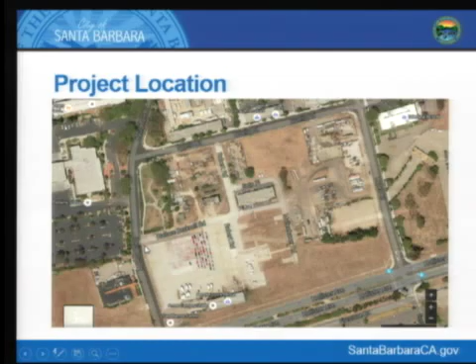Currently, there are actually two lots here. This little park is a separate parcel, and this larger parcel of about almost 15 acres would be subdivided. Approximately 7.99 acres would be purchased by Direct Relief. This also includes the construction of a new public road from Love Place to Lopez Road across the site.

A little background on this proposal. In September 2014, Council authorized a purchase and sale agreement between the city and Direct Relief. The agreement, dated October 9th, 2014, states that discretionary approvals for the project would be obtained within 18 months, so that would be April 2016. However, a 6-month extension would be allowed, resulting in October 2016 as essentially the deadline for this project to be approved.

The proposal came in as a PRT application in December of last year, and then in February and May, both dates, the project went to council. The project was designated as a community benefit project and was allocated square footage and also given a reservation of some square footage, which I'll talk about later. Then the applicant submitted the formal DART application. The city did the review. The project went to ABR on two occasions, in August and also more recently at the end of September. And then they just submitted their second DART application just a couple of days ago.

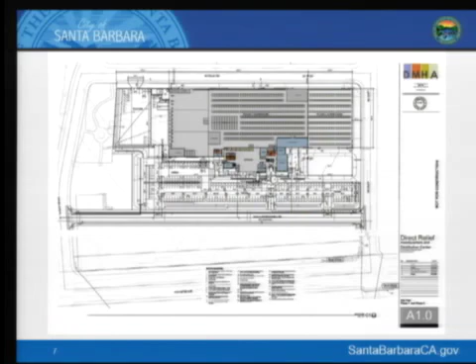Here's the proposed site plan. The project consists of a 155,000 square foot project overall. The distribution warehouse, shaded to the north, is approximately 127,000 square feet with a 2-story office in front, equaling about 27,000 square feet. There would be a secure truck loading area to the west and 162 parking spaces. The project also includes 26 bicycle spaces, 16 located inside the building and 10 outside.

The project site is zoned AI1, Airport Industrial. A couple of notable zoning requirements: a 45-foot maximum height requirement. For parking, it's 1 per 250 square feet for the office, and 1 per 2,000 for the warehouse area, unlike the rest of the city, which is 1 per 5,000. It's a little higher here in this area, and it's also within the Airport Industrial Area Specific Plan.

The discretionary applications for this project consist of a finding of consistency with the Santa Barbara Airport Industrial Area Specific Plan, a development plan for the allocation of 118,500 square feet from the community benefit, small addition, and vacant property categories, and approval by the ABR.

In regard to consistency with the specific plan, I've included in your staff report a list of policies that seem applicable to this project. These include visions regarding flexibility of land uses in the specific plan area, cultural resources, specifically archaeology, visual quality improvements to the project site, aesthetics, the installation of a new public road which is actually included in the specific plan itself, providing vehicle and bicycle parking, and promoting alternate modes of transportation. MTD is nearby and will be improved, and the plan also addresses the environmental impacts included in the specific plan.

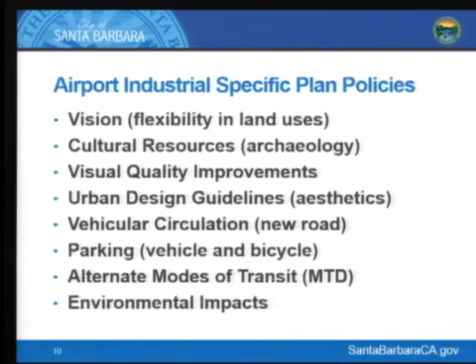The project requires development plan findings, which include complying with all provisions of the zoning ordinance, being consistent with the principles of sound community planning, and not having a significant adverse impact upon community aesthetics or character. Also, the size, bulk, and scale of the development must be compatible with the neighborhood.

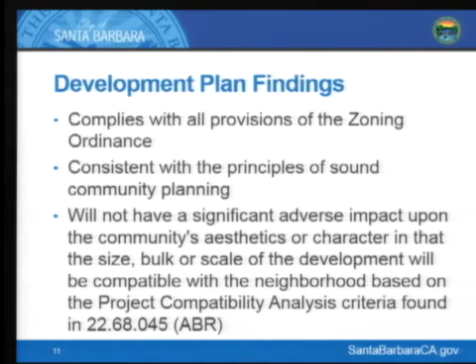This was reviewed by ABR, and they did make the project compatibility analysis criteria and found it to be compatible. Finally, it's consistent with the policies of the City of Santa Barbara traffic management strategy as included in the zoning ordinance.

The square footage for this project, which equals 155,000 square feet, comes from these categories. The council designated the project as a community benefit project. They allocated 80,000 square feet for the project, then approved a reservation of an additional 30,000 because the warehouse may be expanded by another 30,000 square feet, so that would be a total of 110,000 from community benefit, 2,000 from small addition, 6,500 from vacant areas of the specific plan, and some other demo credit that is not included in the development plan approval.

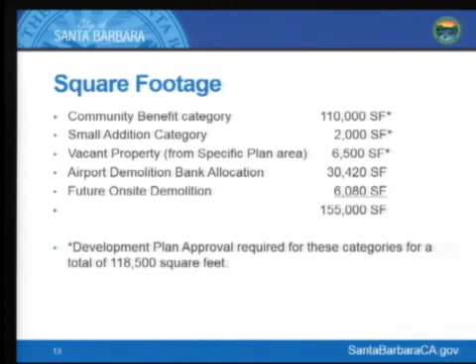They had some comments about restudying and proposing alternative surface treatments for the exterior of the warehouse itself, and to install more mature, taller trees initially.

In regard to environmental review, past projects have been proposed in this area. We have an airport-specific plan EIR for this area prepared in 1997. There was a supplemental EIR for the Gateway project on this site in 1999, and then an addendum for another project proposed in 2005. These projects were not constructed.

For the current project, the applicant has submitted a revised, updated traffic circulation parking study, an archaeological study, geotechnical engineering study, and drainage and stormwater quality study. We are currently reviewing all these reports as part of the DART review process.

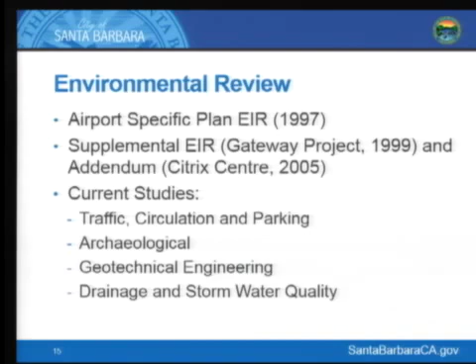The next steps for the project: they've submitted a recent revised project a few days ago. We'll be reviewing that for completeness, and when that's determined to be complete, we'll conduct our environmental review. We estimate it'll be back to you at the Planning Commission in early 2016.

Concurrently, the airport is doing the subdivision portion of this overall project. The airport will submit a subdivision application soon, which will go to the staff hearing officer for approval. They're also concurrently going to be doing the on-site soil remediation, preparing that site for the new proposed project.

Just listing here again the discretionary applications that will be before you when the project returns next year. That concludes my presentation. Thank you.

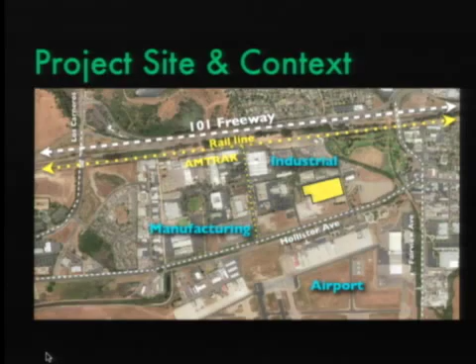While it looks large and flat and possibly unconstrained, we had a discussion about that at the site visit. There are actual constraints that the design team needed to deal with, and I think this project design is responsive to those, so we just wanted to show them to you as well.

So on the next slide, here's the site. You see the roadway names. I just wanted to point out those names are actually aviators who lost their life in World War II. That whole area north of the airport has names that reflect local aviators who passed away in World War II.

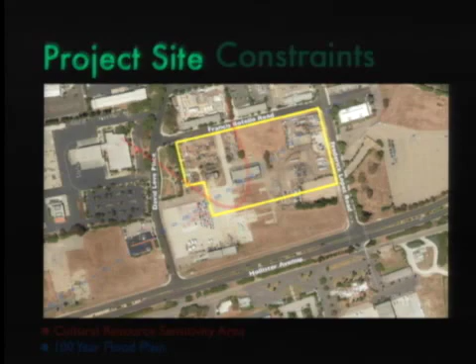So there's the site, and now the constraints. The red line indicates the area on site that has some cultural resource sensitivity, and the blue line shows you the 100-year flood line. In addition to these, we do have some spot soil contamination areas on the site that are a result of the site having been a military air station during World War II.

We also have geotechnical constraints in the way of soils that are loose and high groundwater. We have shallow groundwater on the site and uncompacted fill and a myriad of geotechnical concerns that the project design team has had to deal with in the design of the foundation system and in the stormwater treatment and drainage plan.

So those are subsurface constraints that you wouldn't necessarily see when you go out and look at the site.

Next slide, please. Kathy also covered this really well, but just to quickly go over the major components of the site: the distribution warehouse is roughly 130,000 square feet if we build both phases at once, which Direct Relief would like to do. If there are financial constraints, they have to build 100,000 square feet in the first phase and could phase the 30,000 square feet on the eastern end at another time, but we do hope we're able to build it out all at once. There's also about 30,000 square feet of administrative offices. This will be the world headquarters for Direct Relief, and that floor area is necessary.

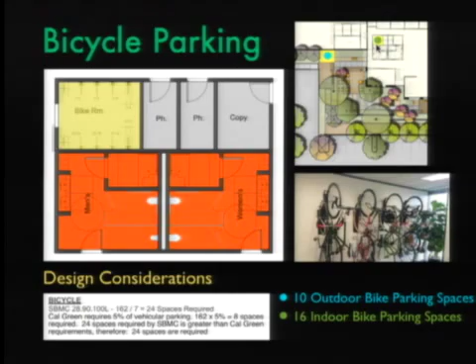And I'm going to let Suzanne come up and make a few closing comments.

Just briefly, it's a sensitively designed project, and it's a use that's compatible with the area and compatible with the uses that were envisioned in the airport-specific plan. It's a large project, both in size and in purpose, a very significant project. We're anxious to hear your comments and hope that you support this project and are as enthusiastic about it as we are.

We have team members here who are available to answer your questions, along with Mike Holliday from DMHA. We have Michelle Swanitz, and we also have Courtney Jane Miller, who is our landscape architect. And also with us is Judy Parch, who is the Director of Compliance and Human Resources at Direct Relief. So between all of us, I hope that we can answer any questions that you might have. Thank you.

Anything else from the staff? I see Ms. Johns and her cohorts here. Do you want to have anything to say?

I do have a question for you while you're in the spotlight. Since this is on airport property and you get money from the FAA, does the FAA have any hooks in this that you have to check some squares with?

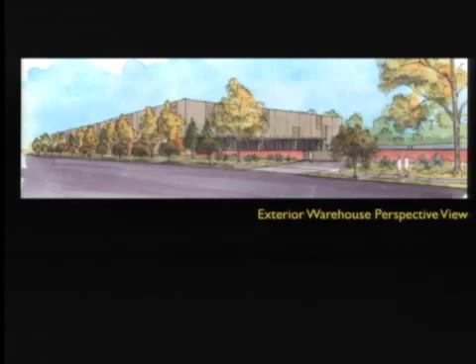They also asked for some larger trees, so we've done some 3D studies. If you're interested, we can show you Camino Real Marketplace, probably the only other large established structure here in Santa Barbara, Goleta that's done this before. It shows that small trees grow big over time, so we want to plant large enough trees — this shows you what it looks like after 17 years of actual landscape growth at Camino Real.

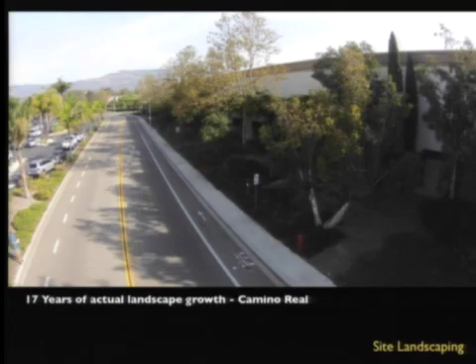This is the Costco building, shot from a drone 30 feet in the air. It's amazing the difference when you're down at the ground plane versus up high. There's one other shot showing what they want to see — some higher trees that break the parapet height on the warehouse building.

So it's texturing that box, the concrete structure, and also adding landscaping to help it articulate. We're also looking at ways to articulate the parapet height — we can't go any lower, so if we do anything, it's got to go higher, which is sort of counterintuitive. We're looking at ways to address that concern.

Okay, thank you very much.

Now, on that topic, still about resurfacing or changing the skin, I have two questions. First, green building design — can you tell me what you've incorporated in that regard? And with such a large surface, which gets to one of the areas staff asked us to comment on in terms of bulk and scale, are there any artistic elements that can be included?

So green building and artistic elements, since in a way this is an area — especially with the airport selling this to Direct Relief — that's going to be viewed in transition. We talk a lot about funk zone transition, but this is a very different area, still city property, but adjacent to Goleta.

And I think there are numerous opportunities with this project to reference that transition. And then I'll get to cultural history, because that also is talking about how we reference the archaeological and cultural history without completely obliterating it in redeveloping this type of property.

My question is related to sort of a gratuitous use of block walls in the front of the building. And maybe it's the landscape plans, but are those there? So you have a lot of CMU block walls in the front of the building elevation. Is that part of the security plan to have that? It's almost like a TSA sort of thing, or just voluntary?

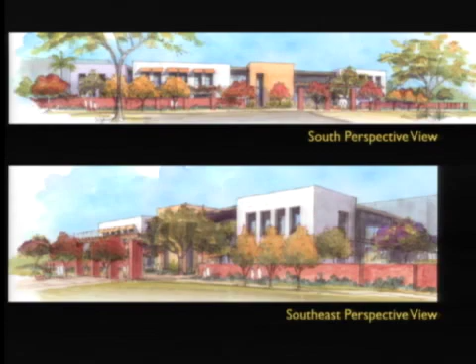Mr. Chair, Commissioner Higgins, what you're referring to is the unrendered plans. We've 3D modeled the entire building, so it's a little deceiving, but we're trying to show ABR what we've actually figured out. This is probably a better image to look at. Those walls actually serve two functions. One is on the back side of that wall is the public breakout area for the boardroom. This whole box where the pointer is located is the conference center component of the building, where we've got several meeting rooms, and that wall serves a functional purpose.

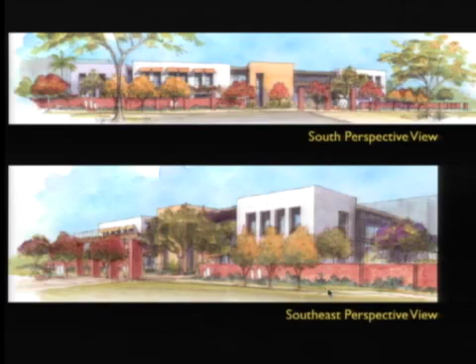It's an 8-foot high wall that basically provides protection, screening, and security for the building towards the front. And then on the other side, towards the south, there's an employee breakout area off the cafeteria.

That's fine, I just was curious if it was a security thing. Courtney, do you have anything to add?

I just wanted to add, the walls you're looking at in this rendering, the orangish colored walls, those are actually intended to be semi-private, relatively open walls. They'll in fact be more like 4 or 5 feet tall. The intent is, as Mike mentioned, to separate those interior spaces from the public spaces.

And just one more landscape-related question. On the infiltration basin, what's the slope of the side slopes? What's the grade to get down to the bottom of the basin? And just to help me out, is there any use for it? Is it fenced, or can you do passive recreation in that, or is that a no-no?

We are looking at that. In fact, that was an early idea I thought was very important to incorporate, in particular that easterly basin, so that we could provide some sort of outdoor, more informal amenity—I won't say recreational—but something that allows for an alternative use for that basin. Currently I believe there is a 5-to-1 slope for about 10 feet, and then a 4-to-1 after that, so it's a very gentle slope down into those basins.

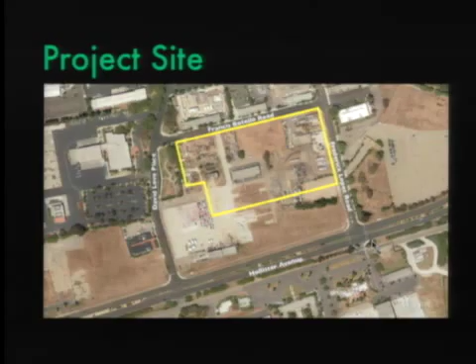There's the front entry, and we actually haven't located any bicycle parking over there. That may be something to think about. But primarily what they thought was it's going to be in that area right there, which was the exterior bike parking for the staff. There's both interior and exterior bike parking. So does that answer your question?

It does, and one follow-up question to that. If someone was biking in, is there a route where they can take their bike all the way around to where the interior bike storage is? Can they actually ride their bike to that spot, or do they have to get off and walk the remainder? It seems like a long walk, and I hope there's a lot of thought put into it, and it sounds like you're starting to, so I appreciate that. But when it comes back, I would like to see some more thought put on paper on how that would actually work for commuting purposes if somebody wasn't simply just driving in and parking.

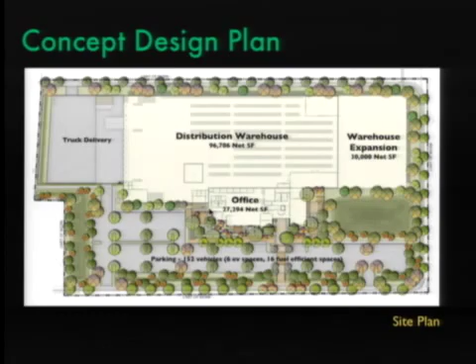Mr. Chair, Commissioner Peugeot, if I might add, if someone were riding a bike to the site, I would imagine they would ride along our new frontage road on the south, Wallace Becknell, and then into the westerly driveway entrance, which is over on that side. If they drive or ride straight in, there's actually a sidewalk that's curb adjacent there where they could ride up to the sidewalk and walk it across, or they could use the parking lot essentially. I'm not asking for that level of detail right now, but I think when it comes back, I would hope to see how those features would actually play out in the site planning and operationally with the employees, because it is a remote site. It's not like you can walk down the block and have lunch or pick up a bus or meet a friend.

Okay, that's a great comment. Thank you. And then I have a couple of questions. I think it's more for staff.

It's back to this question of the allowable uses in the zone, which I think is important for us to get a handle on, at least next time it comes around. I'm guessing from what I'm hearing about the project that it would be difficult to share surplus space if it wasn't immediately needed with other types of short-term lease operations. But I believe in this area there is city intent to also encourage incubator businesses. So I guess either unused space that may occur in this vicinity, or in the event that sometime in the future Direct Relief International decides to move elsewhere or sell the property, what would be the reuse and the ability to meet those kinds of goals? Because this is a single operator taking the use of an entire large site, which is, the need is clear, but we're going to need to look at this once it's built for down the road, maybe 50 or 75 or 100 years from now too. So how does that kind of fit in with that goal?

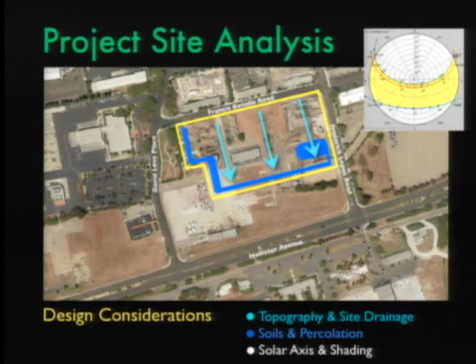Of course, when all those trees grow in, you're not going to be able to see it anyway. But yeah, so we were trying to show the mass, bulk and scale, worst case scenario of looking at the building from that area. Obviously, when you go further north, there are so many existing trees you actually lose the mountains in the trees. So this seemed to be the best place to sort of analyze. Not to mention that the airport project is going to be in front of that, but we're looking at just sight lines across an open piece of property right now. Okay, thank you.

Thank you. I have but one question for staff and the applicant. Given the magnitude of this project and its regional impact, is there any plan in your process to have a courtesy review at the Goleta Planning Commission? I know the staff report says you're working with transportation staff at Goleta, but is there any plan for courtesy review by the Goleta Planning Commission?

Commissioner Chair, we have not talked about that actually, but we are, like you say, in contact with Public Works. Well, given the magnitude of the project and the impact on Goleta, I would recommend that you do that. I know it will be an additional delay in processing things, but I think you could probably fit it in there at some point. Good neighbor policy and all that.

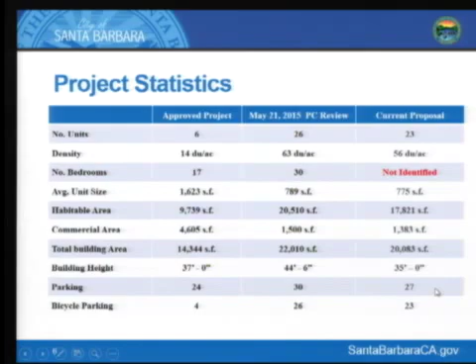Looking at the priority housing overlay and the density chart, the previous version of the project reviewed by the Planning Commission on the 21st of May was at 63 dwelling units per acre. We are now at 56 dwelling units per acre. I just wanted you to see where we fell on that chart.

Staff's recommendation includes some key points: the project does meet the zoning standards, and the applicant is intending a design that does not require any zoning modifications. They have greater than the minimum setbacks required from interior and front property lines, and the project is consistent with the general plan goals and policies for new rental housing projects.

Staff recommends that the HLC comment on whether the project is consistent with the compatibility criteria numbers 2 through 5, outlined in the municipal code, subsection 22.22.145 subsection B. I do have those on the following slides so we can go through that.

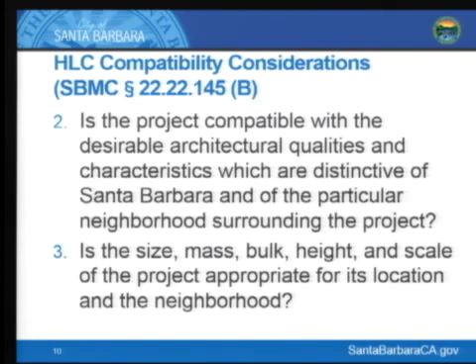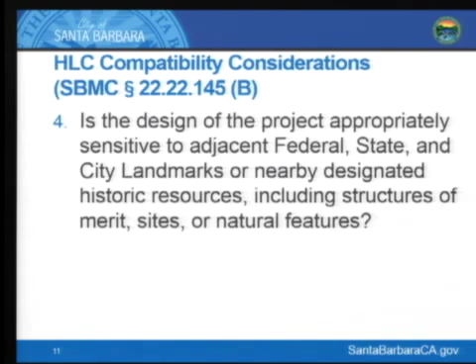These are questions the Commission should ask themselves. Is the project compatible with the desirable architectural qualities and characteristics distinctive of Santa Barbara and of the particular neighborhood surrounding the project? Number 3: is the size, mass, bulk, scale, and height of the project appropriate for its location and this neighborhood? Number 4: is the design of the project appropriately sensitive to adjacent federal, state, and city landmarks or nearby designated historic resources, including structures of merit, sites, or natural features?

Number 5: does the design of the project respond appropriately to the established scenic public vistas? In order to evaluate number 4, I provided relevant maps showing the boundary of the original El Pueblo Viejo, shown in dark gray, bounded by Figueroa, Laguna, Ortega, and State Street. The various colors show whether buildings or properties are landmarks, adobe buildings, structures of merit, potentials for designation, or structures built prior to 1945.

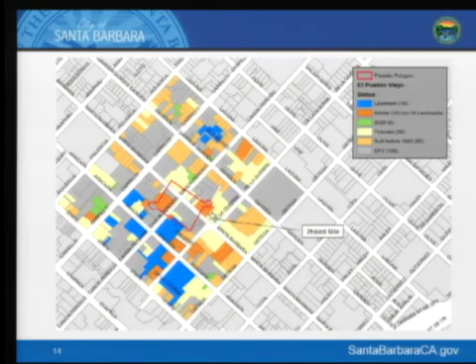This next slide shows the El Presidio de Santa Barbara Historical Park properties in yellow that make up the park, and then a 250-foot buffer surrounding that, shown with the red outline and gray clouding. I have passed out these slides to you, and you have them in front of you.

I'm now going to turn it over to the applicant for his presentation of the actual design of the project and how it has changed since your last review.

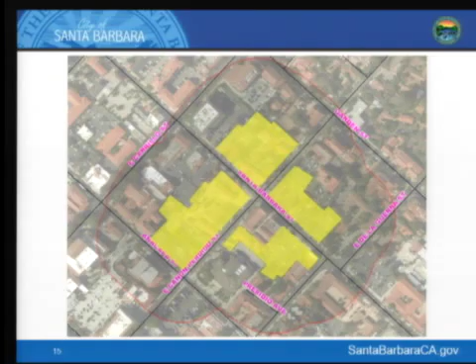Okay, Mr. Hochhauser, are you going to give the applicant briefing? I am. There we go, thank you. I'll reiterate, good afternoon to everybody.

I'd like to start off by going back to Suzanne's information. The staff report for the PC hearing where we last appeared indicated that our prior project was 26,000 square feet. You had indicated 22,000 on your chart, but our notes, drawings, and your staff report had indicated 26,000. We're now reducing it down to about 20,000 square feet, so I think we want to come before you showing movement, and that's an important fact. I'm going to take about 23 minutes today with the presentation, if that's okay. I'll move quickly, I understand time's of the essence.

We appreciate the opportunity this afternoon to present the latest refinements and modifications for the AUD housing application at this address. We believe the apartment project before you now is an opportunity to deliver real infill rental housing at a great location downtown. We feel it's more aligned and has better consistency with policy than the approved luxury condominium project currently on site. It is our intention today to demonstrate that this current project is not only significantly responsive to concerns raised at the prior PC hearing and all HLC hearings, but also champions and incorporates the objectives and design goals set forth in the city's urban design guidelines.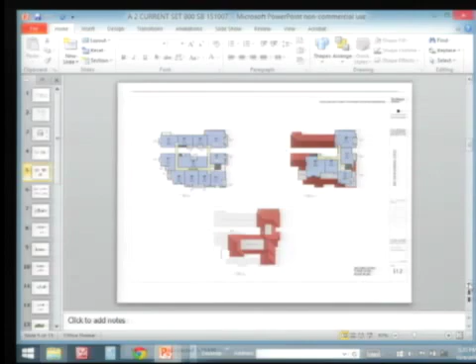If you go to the next slide. Quickly, these slides illustrate the previous proposal before you relative to today. The red dotted line indicates the volume and mass which was before you previously.

Next slide, please. This is a shot showing the Paseo splitting the mass of the building here, with the Anacapa School at this location.

This is the small commercial plaza. When I say small, I mean about 1,000 square feet of placita in front of a small 1,383 square foot commercial space, and then varying roof pitches and roof types to address those comments, a softening of the architectural elements at the corner. Moving right along, please.

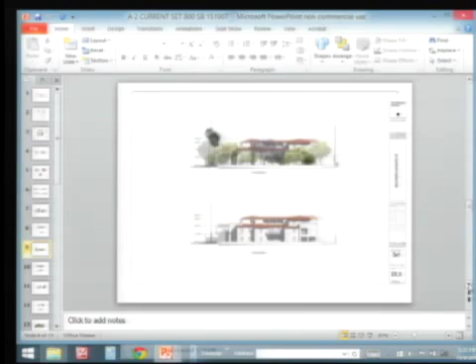And just going right around the building here with the different views, and we can come back to these. I don't want to use up time. Keep going, please.

I might stop here for a second, because in the minutes they liked the elevation facing the Anacapa School. That's what's before you right now.

Next slide, please, with and without vegetation. The landscape plan—you might note in the HLC minutes that they thought the landscape plan was moving in the right direction. Another kudo to Courtney, she's the landscape architect on this project as well.

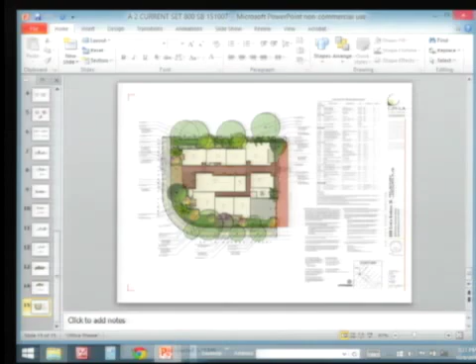Keep going, please. Open up the next file. So this is right out of the urban design guidelines. This is that small placita with the little porch underneath. This is literally what our section would look like through the front of the building on Santa Barbara Street, and it's taken right out of the guidelines.

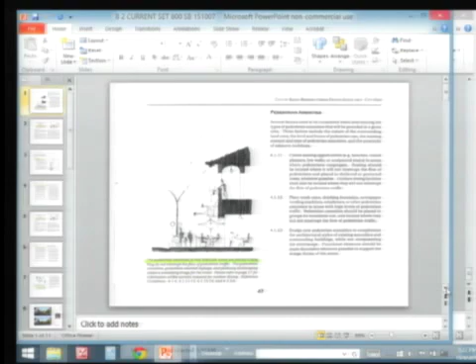The guidelines are replete with discussions about intimate paseos, little placitas, interfaces like this. And I think the project, not to be too proud about it, really does address specifically many of the attributes you can find throughout the guidelines. Go through this—it talks about encouraging this type of design, and then you've got literal examples of it.

And then here we're into the view simulations. You see going east on De La Guerra, and we've got several, so we move around different points to show you. This is kind of a third from Santa Barbara Street—you see the view of the project inserted there. And then as you move closer to the corner, the next slide, please.

The next slide. And then this is coming around onto De La Guerra, on Santa Barbara Street. And then the opposite side of the street. Next slide, please.

The above slide is the proposal. This is as it exists today. And then the next slide.

Now here's a streetscape of all of De La Guerra, showing the inserted project as proposed with the modifications of height. I think if one looks at all the architecture up and down the street—and we also provided the heights as surveyed of various elements on the buildings around us—this is a great one to underscore the compatibility of size, bulk, and scale.

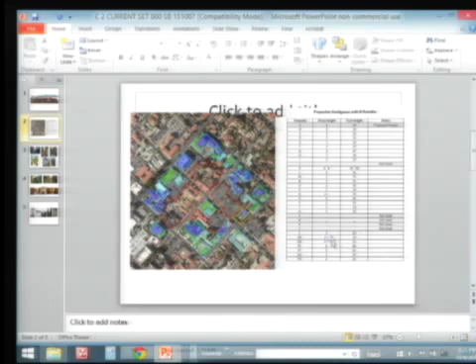The next slide. Yeah, this is a great illustration that shows the surveyed forms and masses of buildings all around and contiguous with the boundary of the Presidio.

The purple elements are the 3-and-above story buildings, the green are 2-story and above, and the very light shaded ones are the 1-story elements. I might point out that we only did the structures—there are other structures of mass and bulk, but only the ones contiguous to the Presidio were utilized in this analysis. And then you can see all the heights and the story analysis.

The proposed project is really a fish swimming right in the middle of the school.

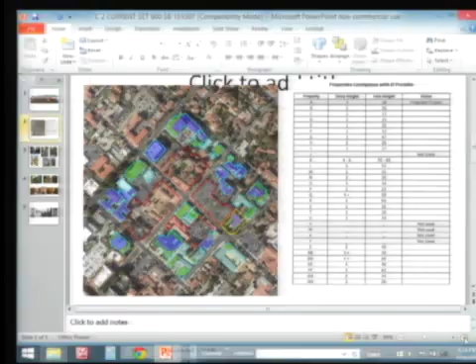So we're not asking for any exceptional height. We're not violating the fabric and texture of what exists all around the Presidio. There are many buildings that are 4 and 5 stories, 60 and 70 feet, right up against the boundary. As pointed out by the Anacapa School and our design drawings, the half of the project on the north side of the Paseo is literally lower and further set back to that boundary of the park and the Anacapa School than the project that's approved.

And then these are just examples, some in Santa Barbara and some without, of little paseos and intimate streets that show balconies and residential situations, which is really, if you read through the urban design guidelines, all about this kind of approach to the architecture.

Next slide, some more. Just to underscore that the architectural elements in our proposed design very much incorporate these kinds of headers over deep set openings, columns, heavy timber eaves, literally the stuccoed adobe walls with the tile caps, and these kinds of balconies. If you look at our drawings, this is what you find throughout.

We're working with the HLC. We believe we're on the road to a successful evaluation by that commission, especially with these responses to our last hearing. So with that, I'd like to point out that we feel we've addressed the concerns we've heard all along, and we've got a project that, even without the AUD, in terms of size, bulk, and mass, and architectural styling, is within zoning issues in terms of setback, height, and step back — we're right there. And this is an AUD project trying to deliver, consistent with housing policies in the general plan, some housing to the downtown. So I'll save the remainder of my time for questions and further discussion.

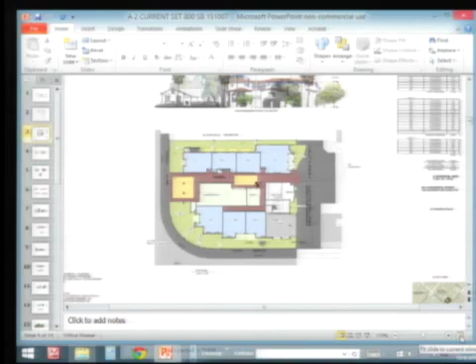So this placita is about a little over 1,000 square feet. It interfaces, this front of it interfaces with the sidewalk and the crosswalk as you come up De La Guerra from the west. If you recall, going back to the site plan, the intersection is offset, so as you're moving east on De La Guerra, you actually have to go around this jog. The crosswalk from this side of De La Guerra comes across right here, and this placita has a complete interface with the sidewalk. It is partly exposed to the sky and partly under porch, just like the diagram I provided in the urban design guidelines previously. So this is kind of like a little commercial plaza for tables and chairs — it might be an ice cream shop, a coffee shop, or a small restaurant. Then there's about 1,400 square feet of commercial space along the paseo of the project.

And the orientation of the commercial space is to the paseo or to the street? To the placita, to the street. So these are the openings into the commercial space right here.

Okay, and then the ground floor residential units that face the street, not the ones that face the Anacapa School. Could you walk me through where their outdoor space or outdoor living area is? I bring this up because one of my concerns is how that could create a potential conflict with public use of the street, with someone having their outdoor living area right where there's major pedestrian activity with tourism.

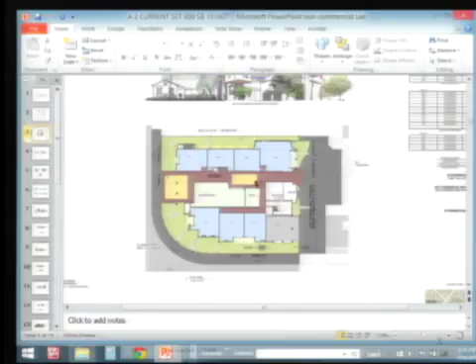Well, this is a fairly significant landscape buffer. The access to the units is from the paseo, and these are private little patio areas buffered from the retaining wall. There's a natural sandstone retaining wall at the sidewalk of about 2 to 3 feet, and then a 10-foot landscape buffer, and behind that you've got a private patio. So any pedestrian traffic on the sidewalk is not only below the sandstone retaining wall, but there's about 10 feet of vegetation between that wall and the private patio. So there's no direct traffic from this sidewalk to these units.

It all comes from here. The elevator's right here, bicycle parking's right here. There's lots of traffic that would come through here. By the way, I might mention, Commissioner Pujo, consistent with some of the larger policy goals of planning, this paseo has direct access to the historical fountain in the building behind.

Correct, yes. And the residential unit closest to Santa Barbara Street, where is its outdoor space? No, sorry, the other one, south, down there. Again, it's right at this corner, but there's 20 feet of landscape buffer between the edge of that patio and the corner. And what encloses that, is it enclosed by a wall? It's recessed deeply into the mass of the structure so the walls look really thick.

I see, so the walls come up around a little bit. I can kind of see how it might do that. Okay, those are my questions. Thank you.

Commissioner Higgins. Thank you. On page 3 of the staff report, there's a table showing the approved project, the May 21 review, and the current proposal. There's a blank there in common open space. So it looks like you had 1,500 square feet of common open area, and now you have 0?

That's incorrect. Okay, yeah, so one of the last issues, Commissioner Higgins, before staff let us come back to this HLC hearing, they wanted to review the drawings to make sure substantial changes were made and that we met all variance and zoning code requirements. One of those issues was to make sure we met the common outdoor open space. So the courtyard that the Paseo runs through actually meets those dimensions on the interior of the project here.

Okay, and then the slides that you went through, the 3 slides on 24, 25, 26, which are your visual simulations. From De La Guerra, from Garden, 2 spots on De La Guerra, 1 spot in Garden. No, two on De La Guerra, 2 on Santa Barbara. And then, that's what I meant. And has HLC seen those? They have not. Okay, that's troubling.

So then, Ms. Regal, could you remind me on the whole distance, whatever the proper phrase would be, for historical or cultural sites? So you drew the line at 250. What are the considerations inside that 250 line? And isn't there a step up? Is there a lower distance where there were greater protections, and then once you go past that distance, but you're still within 250, it's kind of like a guideline, less protections? Could you just remind me what those 2 stages are?

It's 100 feet of a designated structure, and it's a 250-foot buffer around the El Presidio de Santa Barbara Historic Park. Okay, should be sensitive. And in the 250, then, we're clearly inside the 250. What are the considerations there for protection in general?

I'm sorry, now the blue, maybe take it from the top with that. I appreciate that. Okay, let me make it clear once and for all. The illustration is the most recently modified project responsive to HLC's comments. The red line is the 4-story version, the AUD project that was before this commission in May. The blue line is the project approved by the previous property owner, Foley. I see, and that's the luxury condominium project. I understand that, thank you.

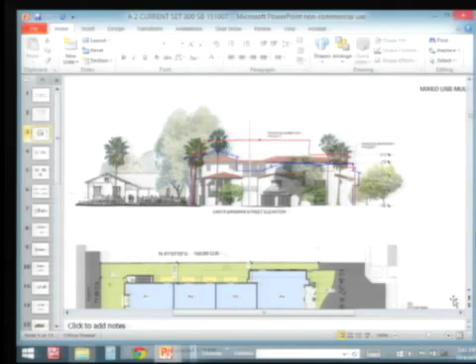Okay, Commissioner Pujo, question? Thank you. I do have one last question before we move on to public comment. Could staff, I imagine it'd be a staff question, please remind me of the existing and proposed legal status of the Paseo? Is this a dedicated public space or a private space? The Paseo as drawn on his plans?

Well, the Paseo as it exists now, where the flagpole is, and then as drawn on the plans, I don't know what the difference is between the two. Okay, so how it exists today was the subject of a historic resource report, and it did speak to it being an important resource to consider about the placement, and that project proposed to maintain that Paseo through the radial stair and the flagpole in its existing location. But maintain it in what capacity? Private open space or dedicated public space? It was still going to be private.

Private, okay. And then how does that compare with the Paseo on this design? Still, I believe, designated to be private access. And perhaps Mr. Halkhauser can, I would like dimensions and status. Okay, so let me tear into this a little bit.

We eliminated one unit to increase the relationship of balconies in terms of privacy. That was the comment with regard to livability. So what came about was the reduction of a unit and the significant widening of the paseo at that point. That also reduced some of the building's mass and opened up the paseo, alleviating some of that congestion.

Number five, further reduction of mass, bulk, and scale are requested. So we lowered some of the roof heights. We changed the roof height over here and lowered it from where it was.

We articulated some of these roofs and instead of gable, added a hip, modified balcony roofs. We did that on both the Santa Barbara Street elevation and the rear elevation, and reduced some of the mass.

Number eight, I already explained—that's part and parcel to the livability. Number nine was just cleaning up some of the illustrations on the windows.

Deep set windows need to be traditional. Our intention is to make them very traditional and comply with that completely.

The architecture is lacking charm. I had discussions with one HLC member. He said, just your drawing style—get it away from the computer and illustrate the softening details you're talking about to be more rustic and poetic. I think that's just a design thing that is easily addressed.

The challenge is to make this the best AUD project in the city. We do want to make it a good AUD project, no question. An arborist report is in preparation.

Part of what I just explained was varying the symmetry and changing architectural elements to eliminate the symmetry and address comment thirteen.

So you don't have symmetry on either side anymore of the entry to the paseo, but you've got a gable with one kind of balcony, and a hip with another kind of balcony. The same kind of treatments were applied to the rear to break down that symmetry. That was the concern.

At 14 didn't need to be addressed, as the Commission was supportive, and again, the Anacapa School likes the direction this is going.

Number 15, the architecture should align with the corner configuration. I think that had to do with site planning and making sure that the building is oriented on both streets as you approach the corner, and we've done that.

We've articulated the corner here. As you can see, please go to the Santa Barbara elevation. There you can see these forms step around the corner to address the big curve of the corner.

They asked to show the outline of the subterranean garage on the landscape plan—we've done that. That addresses all the comments. As I stated at the beginning of my presentation, item 17 is that we intended to address both PC comments and HLC comments with this presentation.

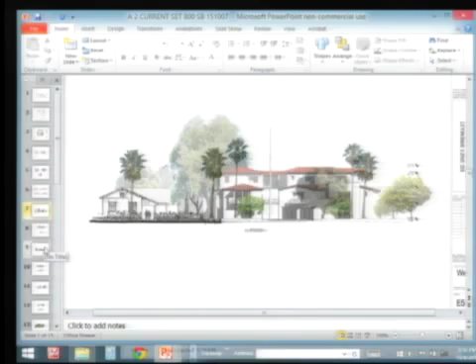Okay, thank you. I also want to ask you about ingress, egress on the project as you've currently defined it. I don't know if you have a sheet in our plans that adequately describes that, or maybe a slide. With 23-ish units, I'd like to have a sense of how, as residents...

Topography drops as you go down east on De La Guerra. We took advantage of that to create access from the alley to the subterranean garage.

Again, just taking the opportunity to remind the Commission that subterranean parking is an expensive thing, but it is a good thing for the city and for the project. It's one of the things I want to point to that helps address sensitivity to historical resources, and to address Commissioner Jordan's question of what those sensitivities involve. There are no specific empirical guidelines—it's just about sensitivity, size, bulk, and scale.

So the way we handle the parking and the way we bifurcated the project to make this lower than what was already approved, we believe goes a long way towards addressing those sensitivities.

And the alleyway you're talking about, that's De La Guerra? That's the alleyway that runs off of De La Guerra. Does it go all the way through? I'm trying to recall, it goes to the back of the Anacapa School. There's parking up on the back, that's my point. Ingress, egress is De La Guerra Street. Right, yes, that's correct.

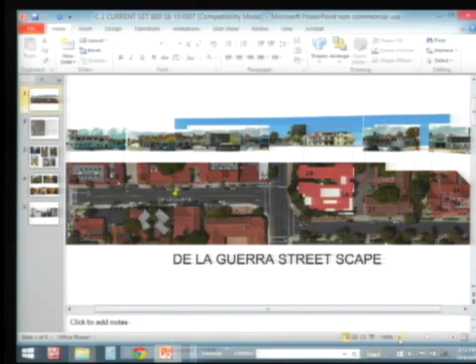Commissioner Higgins, you had another question? Yeah, I'm sorry, to the chagrin of the city attorney, I neglected to disclose an ex parte I had. When he turns around I'm sure he'll glare at me, but I did have an interaction with the applicant and his attorney before this hearing. So should I wrap your knuckles? You may.

Okay, Commissioner Lodge. Thank you, Mr. Chair. Now, just a slide or two back, there was this strip across the top which showed the relative heights of the buildings, but the first request from the HLC was to provide a photo sim showing the building's view impact on the mountains, specifically Montecito Peak. Yeah, go back to the view. There's no way that I can tell what's going on with the size of that.

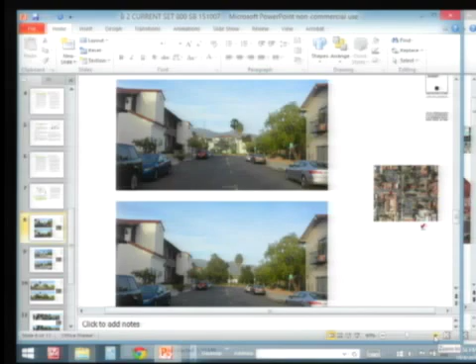There you go, there. So this is the first slide taken on De La Guerra, looking towards the property. That, I believe, is Montecito Peak. And this is the project. What we did is we surveyed story poles to get reference points to the virtual image, so we can accurately insert the model of the building into the photographs with certainty that we're very close to the exact heights of the building. We then moved up the street and took another picture, closer to the site.

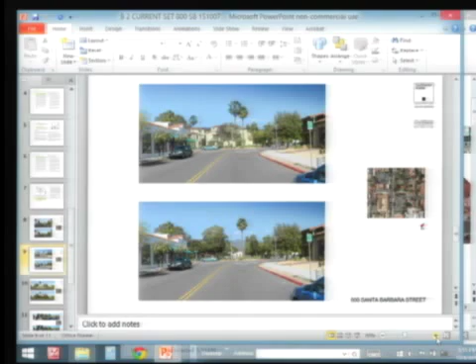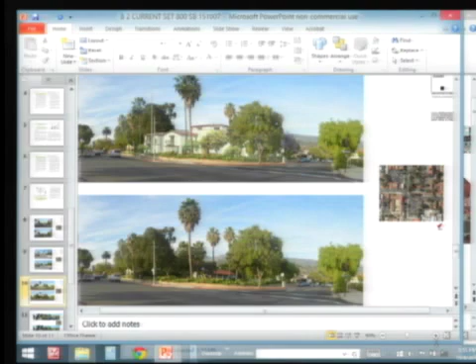And you can see the height grows as you get closer. And then we went around the corner and took pictures, both from right at the corner, looking right across the site. We were very careful - this vegetation, these trees right here, would be removed with the proposal before you today, but it does open up some mountain views here. The massing of the building would block the mountain views here, while these mountain views would be maintained. Then, from a pedestrian standpoint, walking up Santa Barbara Street looking at the site, this vegetation is maintained in the landscape plan and saved, and these are the relative impacts of the proposal.

Okay, and then, well, that's helpful.

You have, I couldn't find anywhere in all the various bits of documentation we have here - you said there are now 23 units, and how many parking spaces? There are 29 parking spaces. 29, and how many are required for the commercial? 3 are required for the commercial. Okay, so you do have some above what's required for the number of units.

And have you not yet determined how many, have you not done interior floor plans? Do you know how many bedrooms they're going to be? Well, I can give you a good idea. As this is a conceptual review, we have the unit sizes, and anything at 650 and below would definitely be a studio. From there to 850 would be a 1-bedroom, and anything above that would probably be a 2-bedroom, but we don't have a specific bedroom count as of yet. The larger units would have 2 bedrooms. So they're not going to be any 3-bedroom units? No, there are no 3-bedroom or 3-bath units proposed. Okay.